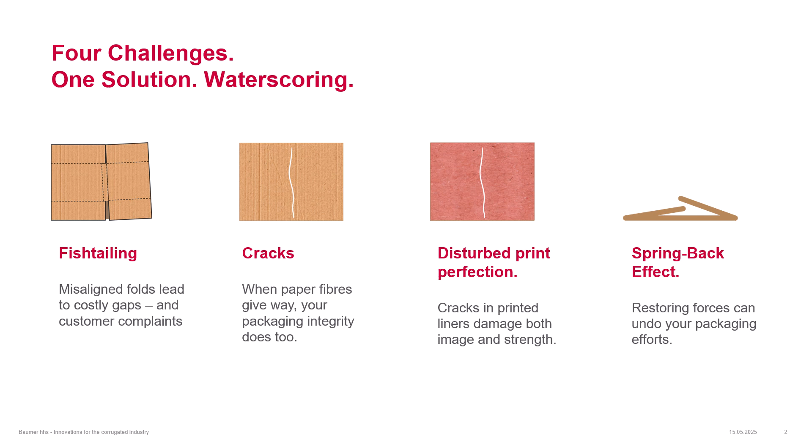Let's get straight to the point. We're not here to talk theory. We're here to talk real problems. Problems you've seen in your own production line: fishtailing, fold line cracks, boxes that won't stay shut, creases that split, and worst of all, dimensional defects that mess with your customer's case erector. These aren't small issues. They jam machines, waste material, and frustrate customers, and it all starts at the fold.

That's where water scoring comes in. We use a purified water blend with an additive that lowers surface tension, applied directly on the board or to the score line as dots or a fine line. Dot mode works up to 150 meters per minute. Beyond that, we switch to a continuous line, still precise, still controlled. And the result? Cleaner folds, fewer cracks, stable, repeatable output.

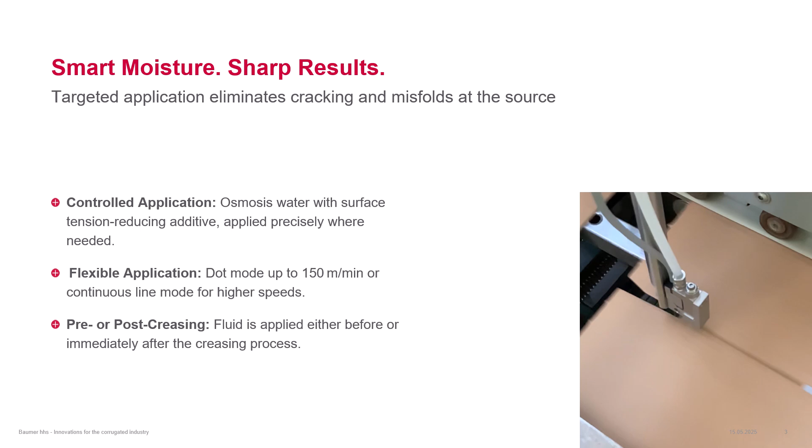Water scoring is running right now on flexo folder gluers, multi-point gluers, and other corrugated machinery like laminator lines, and the impact is measurable: less waste, fewer cracks, consistent box dimensions. Best part, it's retrofit ready, installed fast, delivers immediately.

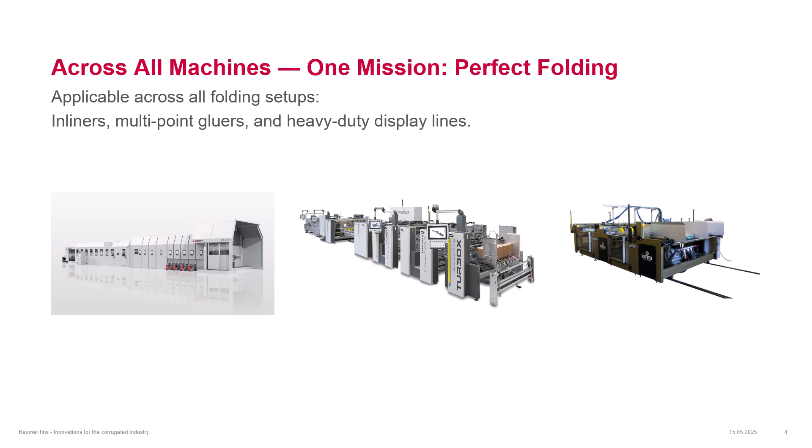But we're not stopping there. Wraparound packaging? Huge potential. Water scoring lowers restoring forces, so glue seams need less adhesive. Reopening is avoided. Pack on demand? Sharper creases can eliminate slotting. That means stronger boxes, built faster, with less complexity. And when water scoring and adhesive systems are controlled through a single Baumer HHS interface, that's true integration. That's value.

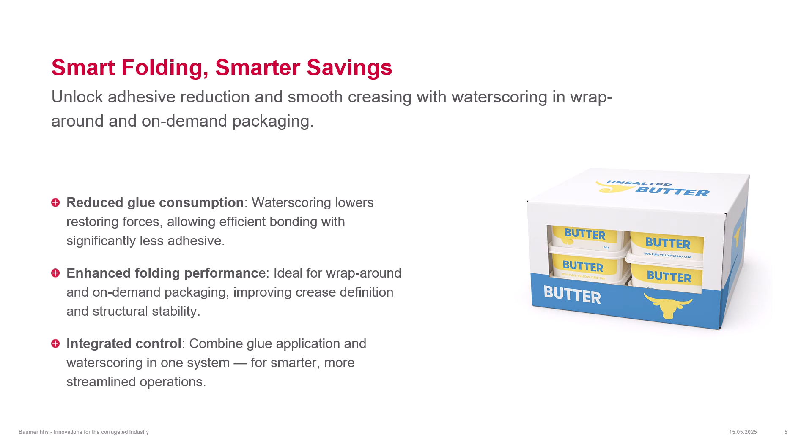Gap deviations, small offsets, big trouble. Fishtailing is one form. Gaps taper, folds twist. The result? Misfeeds, jams, downtime. Seams stay open. Boxes lose strength. Contamination becomes a risk. Loads shift. What starts as a small fold error turns into rework, complaints, even recalls. We can't fix what we don't understand, so let's take a closer look.

Let's talk about what really causes fishtailing and gap deviations. It comes down to two things: the machine and the material. First, the machine. Misaligned folding bars or scoring wheels. You'll get systematic dimensional errors. But the good news, they're consistent. You can detect them, fix them, move on. Scoring pressure, though, is another story. If it doesn't match the board, folds won't behave. Some even switch tools for different grades, which works but costs time. And downtime means lost production.

Now to the tougher part, the material. Moist board creases cleanly. You've seen it fresh from the corrugator. But as it sits, it dries unevenly. That's when the trouble starts. Cracks, fishtailing, misfolds. And moisture's just one piece. Structure, paper type, storage, they all play a role. Bottom line, when the material properties change, you need more than a machine adjustment. You need a water scoring solution that controls the fold where it matters.

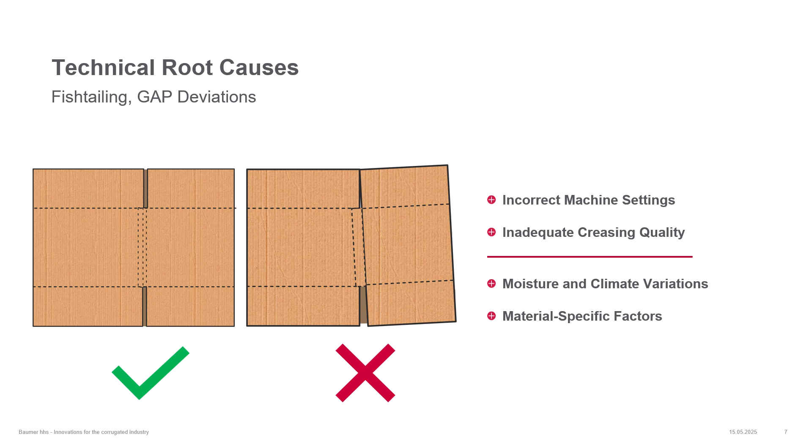Let's be honest, not every box ends up with critical dimensional issues. It really comes down to the material you're using and the box design itself. Now, the two examples you see here, they've shown up repeatedly in customer tests as especially sensitive to misalignment. These are the formats where things can get tricky. But here's where it gets interesting. When misalignment does happen due to material behavior, it's rarely consistent. We've seen it over and over again, in our own gap measurements and in the field.

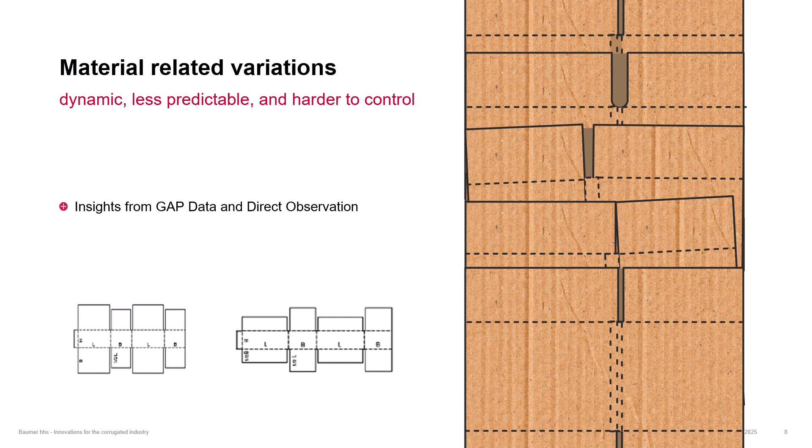You might get a few blanks that all deviate the same way, and then suddenly one jumps the other way. No warning, no pattern, and that's the real problem. Because when those shifts become random, the process gets unstable. And quality, it's no longer something you manage. It's something you hope for. That's not how a modern production line should work.

Not all scores behave the same. Across the flute, no big issue. But parallel, that's where it gets tricky. Researchers tested 180 single and double wall boards under standard conditions. Every score angle relative to the flute worked fine. Except the parallel one. Why? Because it depends where the wheel hits. Land on the flute peak, clean, deep crease. But land in the valley, and misfolds and liner tearing begin. Worst zone, 20% into the gap between flutes, where side forces peak. That's where misfolding and gap shifts begin.

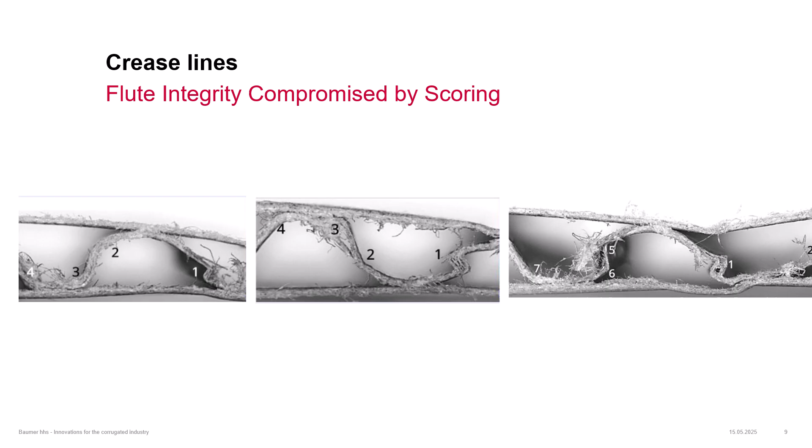Let's take a closer look at the machines, because they're not all the same. It's not just about integration effort, it's about how they're used and what they handle. Take multi-point gluers. They process complex designs, mostly on single wall board, E, B, or C flute. That means narrow flutes, tight scores, and tighter margins for water scoring. Every machine type and its applications have distinct requirements that must be met for optimal performance. Understanding those is key to apply moisture where it works and build solutions that truly fit.

On multi-point gluers, the real challenge is the box itself. Irregular flaps, asymmetrical shapes, thin, sensitive board. Water scoring helps, if it's precise. But if you miss the crease by a few millimeters, the fold fails. Too much water, especially on recycled liners, and the paper starts breaking down. Fibers tear, layers separate. The crease collapses.

One customer ran tests without surfactants. The water didn't absorb fast enough. It sat on the surface and ruined the fold. So here's the bottom line. On these lines, water must hit the right spot, with the right dose, and the right chemistry. Otherwise, you turn a solution into a problem.

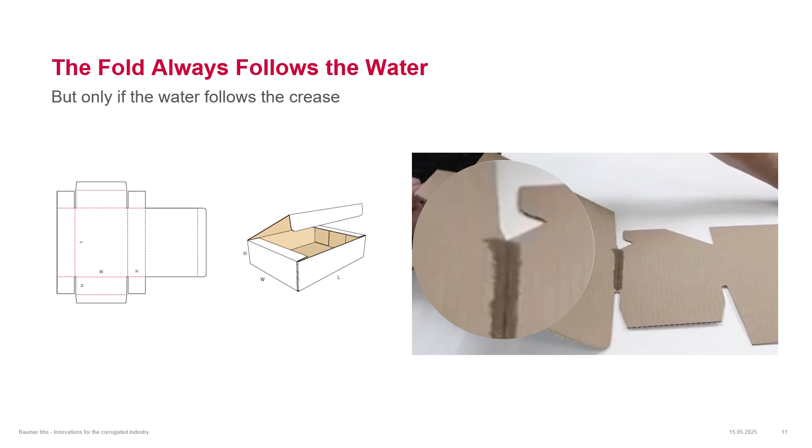Hear that? That's water scoring in dot mode, running at 100 meters per minute. Clean folds, no cracks, just the right moisture, never too much. And here's what makes the Xact Easyfold system stand out. It places individual dots up to 150 meters per minute, dot by dot, every dose identical. No matter the speed, the system delivers perfect consistency. That's key when working with thin corrugated board, where every drop counts.

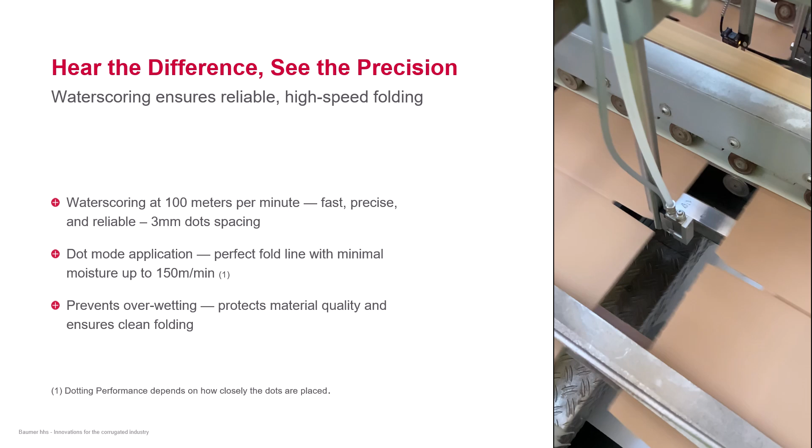And once you go beyond the preset speed, the system switches to line mode automatically, still smooth, still safe, still controlled, no overwetting, just precision at every speed. The SW600 valve does what others can't, dot mode application, even at high speeds. And in folding carton production, that matters. Because too much or too little moisture ruins the fold. With SW600, every dot is identical, precise, repeatable, no leaks, no drift.

And here's the real difference: durability. Most solenoid valves fail from coil heat, but the SW600, we ran it at 850 Hz, non-stop, and the coil stayed cool. Yes, the stroke adjustment takes some getting used to, but once set, it's rock solid. Pair it with the Xact Easyfold system, and you've got a dotting setup made for performance.

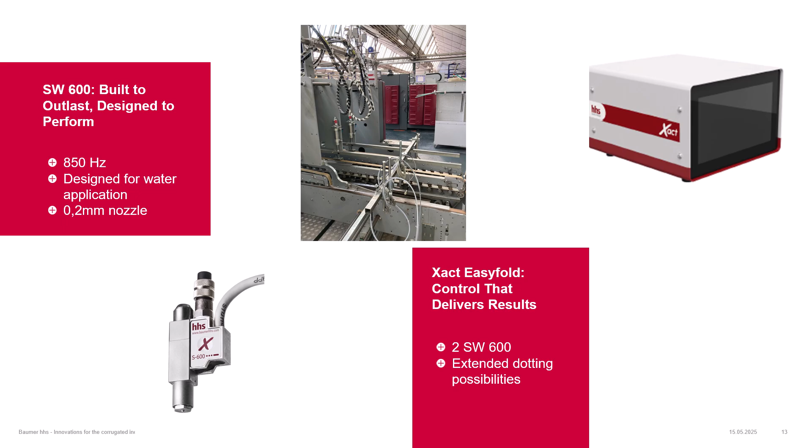Let's talk about inliners, also called flexo folder gluers. They build slotted boxes. The standard of the industry: flat, fast, foldable. But here's the challenge. The material varies. B flute, C flute, double wall, even triple wall. And each type folds differently. Inliners also use wider crease lines, so we need more moisture per fold, not random, controlled and consistent.

And then there's the machine itself. More enclosed, more complex, harder to access. Integration is not plug and play. That's why we don't just install, we customize, with modular mounting kits tailored on site, because with inliners, precision and adaptability go hand in hand.

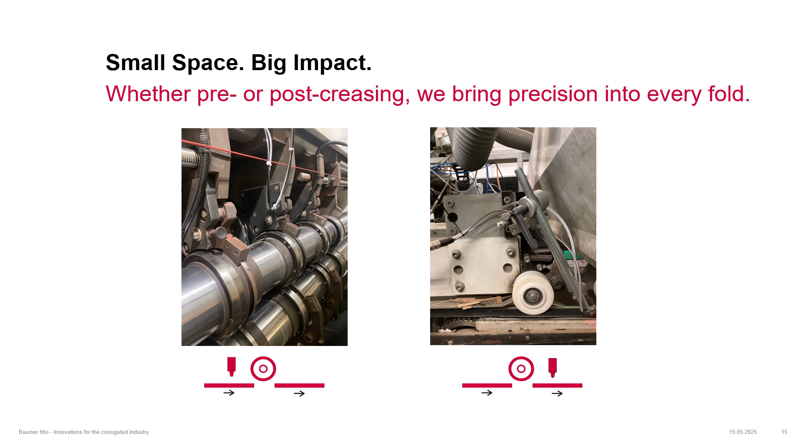In inliner applications, there are two ways to apply water scoring: before creasing and slotting, or after, directly on the score line. Each has pros and cons, but one thing's clear: space is limited. So integration must be exact. Here's the upside: many inliners have adjustable folding rails, and we use them as mounting points. That's a big plus. Once the valves and sensors are aligned, they stay aligned. No need to reset across the full machine width. It saves time, reduces errors, and keeps scoring consistent.

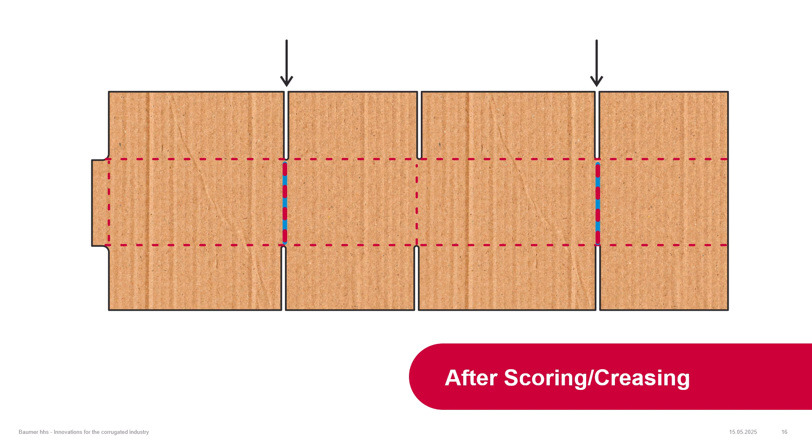Let's start by looking at the application of the moisture solution after the creasing or scoring step. Here's a real-world example from wine packaging, a box type many consider forgiving. We applied water scoring on a Bobst 924 after the creasing unit directly on the score line. Without it, the adhesive gap skewed by up to 4 millimeters, visible and unacceptable. With water scoring, that skew disappeared. In most cases, it wasn't even measurable. Worst case, just 1 millimeter.

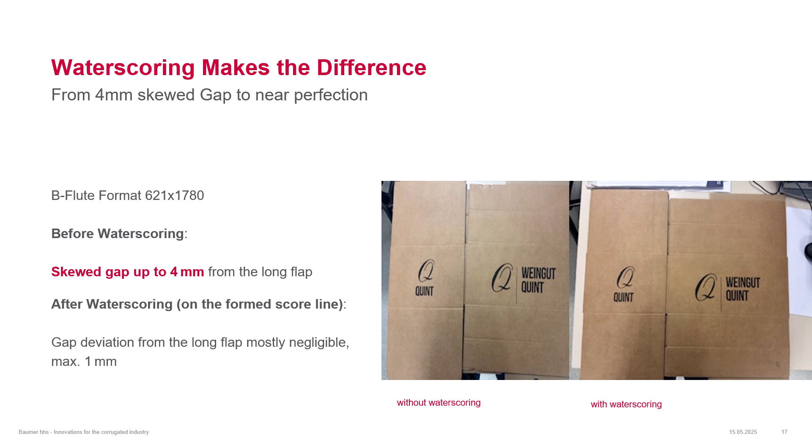And this wasn't lab work. It ran with a high production speed with 2 to 3 bar water pressure. Bottom line, even with easy packaging, water scoring delivers better alignment, more stability, fewer quality issues.

Here's what direct water scoring on the crease line delivers. In a B-flute field test, the creasing wheels were completely disengaged, and yet the fold held perfectly. Only minimal wheel contact was needed for guidance. That's the power of precision. Apply the right water amount in the right spot, and the fold follows the water line. Apply too much, and the board softens.

But done right? Box compression tests showed no drop in strength, even directly after application. No soft spots, no failure. Double E flute held up. But heavier boards like BC flute, they resist more water penetration. That's where the limits start. So, direct application on the score line works best on light to mid-weight board, if it's controlled, consistent and clean.

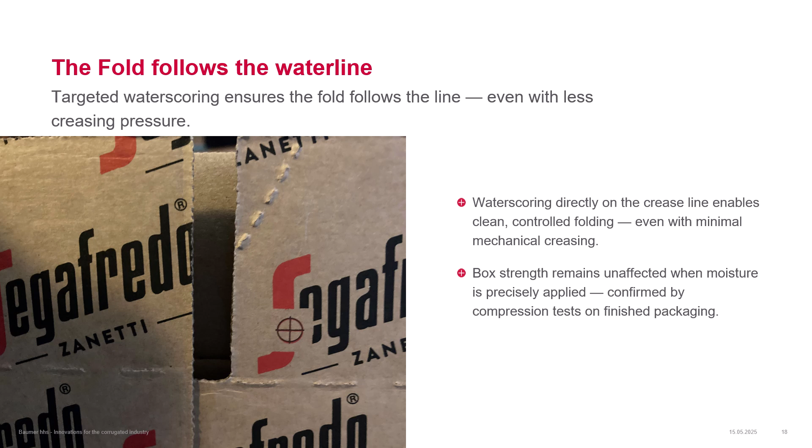Mounted on the folding rail, the water scoring nozzles automatically move with the machine's format setting, always aligned with the score line. The operator just enters the desired water line length in the Xact Easyfold interface. A margin of 5 to 10 millimeters from the panel edge works best. One important point: make sure water hits the board, not the machine. That's what keeps folds precise and your equipment protected.

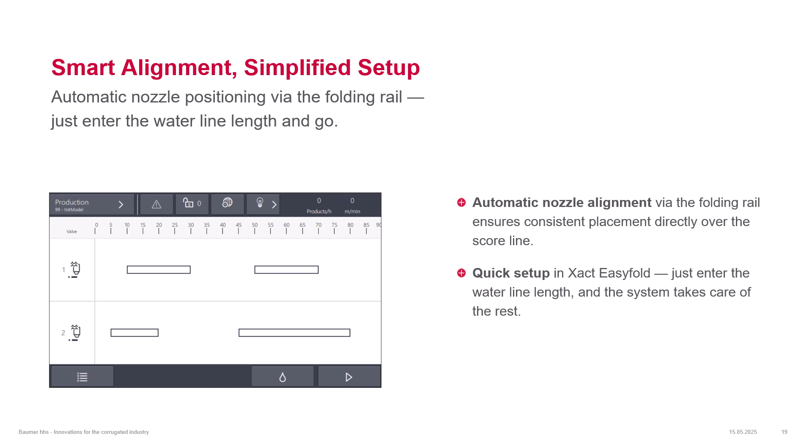Let's start by looking at the application of the moisture solution before the creasing or scoring step. Let's look at what happens when we apply moisture before the creasing and slotting unit. Unlike post-creasing, which controls the fold line directly, this step does something else. It preconditions the board. The moisture softens the fibers, so the scoring tools can form a cleaner, sharper crease. More precise, more consistent, less affected by liner stretch or back pressure.

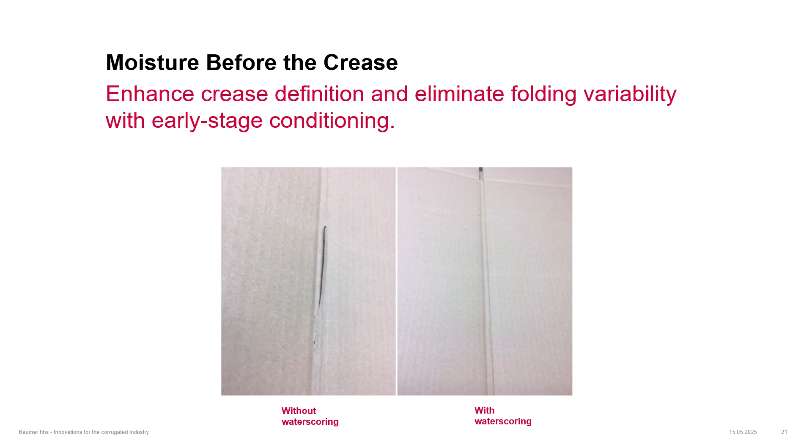It suggests that pre-wetting might be the better choice for heavier flutes. But to be fair, we need more data to confirm that. Still, this image shows what's possible.

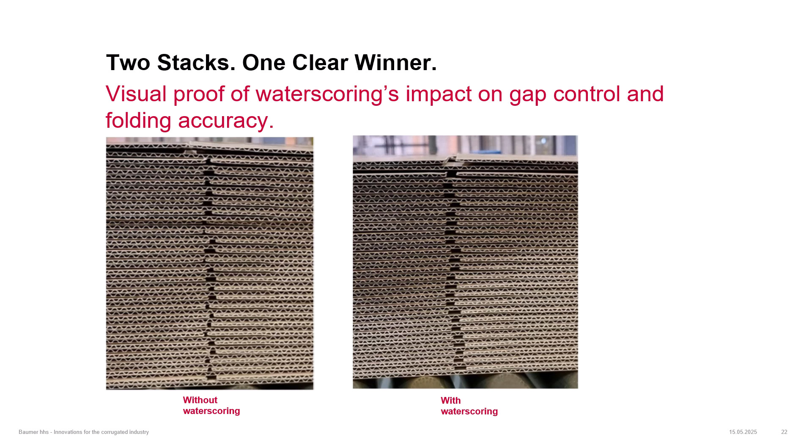Simon and his team had their hands full during the install on the Martin 1232, but they nailed it. Big thanks and congratulations to everyone involved. What really made the difference? A customer who was all in, committed, supportive, and fully engaged. That kind of partnership doesn't just get the job done, it makes it a success.

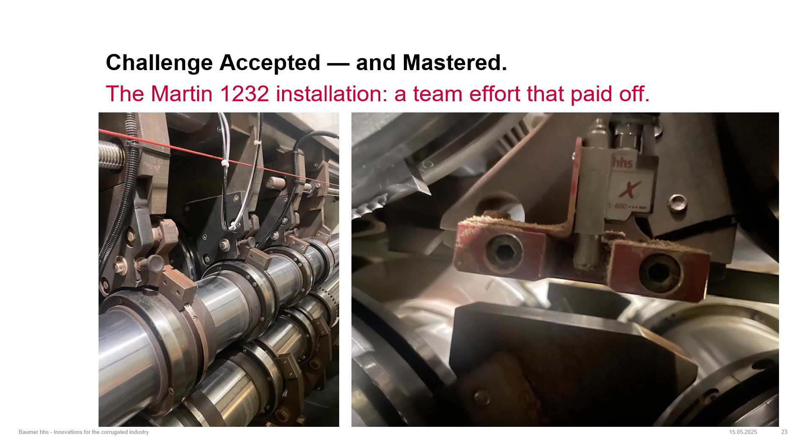Earlier, we saw great folding results from a German test with water scoring before the scoring unit. But there was a downside: paper buildup, some rust on the scoring wheels. Now compare that to our field test in Sweden. Same setup, same timing, but after 2 months in production, no rust, minimal dust, clean performance. So what's different? Possibly the amount of water.

But one factor stands out. The Swedish customer adds 10% alcohol to the mix. That might be helping to keep the tools clean. We're now reviewing this carefully, technically, procedurally, and from a safety standpoint. Important note: alcohol use is not yet approved in the system. We need to resolve all safety questions first.

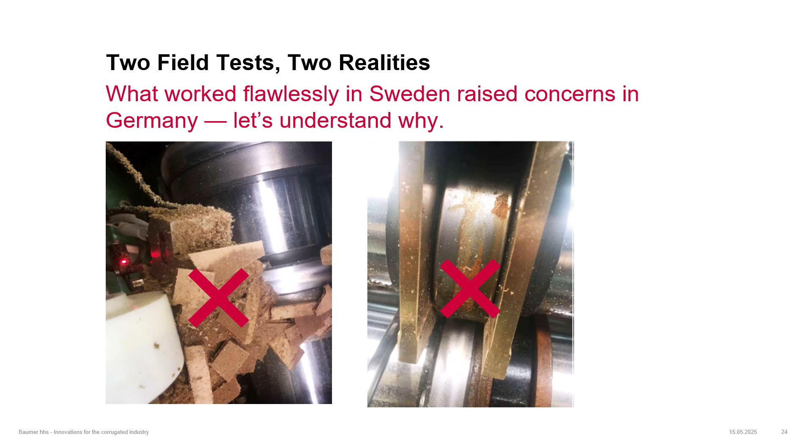Let's talk about why the SW600 makes sense, even on an inliner. First, its size. It's compact, so we can mount it close to the board, even in tight spaces. That's a real plus in a crowded machine. Second, it was built for water. And that matters, because water plus metal usually means rust.

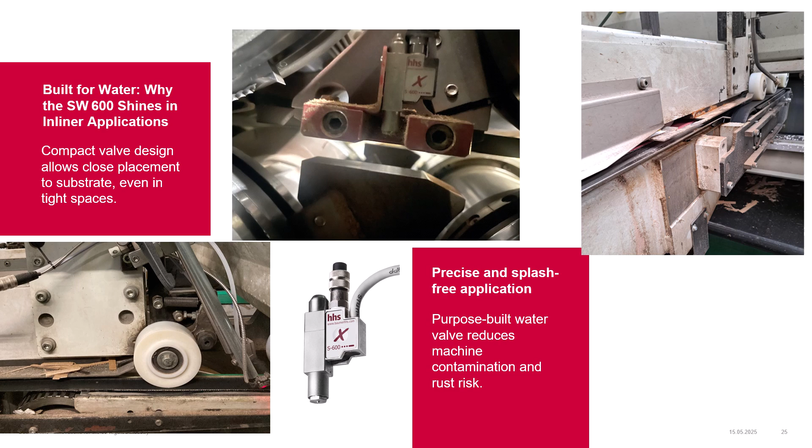Here's another example of just how versatile water scoring really is. We've got 3 Lamina machines running our system, processing heavy corrugated board for display packaging. Slower speeds. No additives, just pure water. And it works. It's a strong reminder. Water scoring isn't just for inliners or gluers. There's untapped potential in end-of-line custom packs and across many corrugated applications where targeted moisture adds real value.

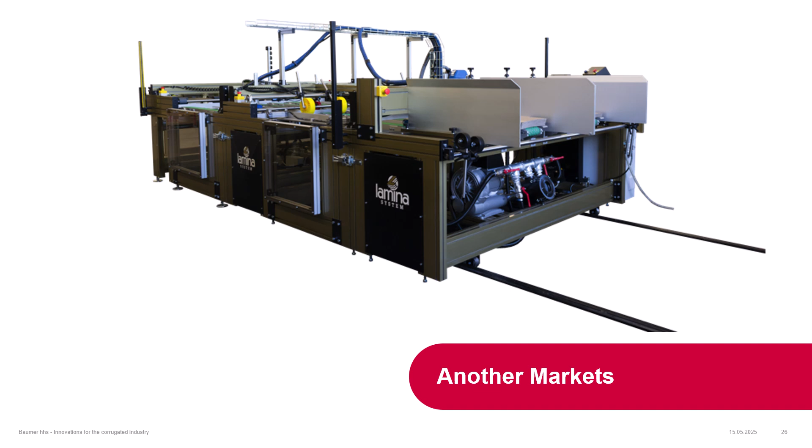Let me walk you through the current project timeline. The core package for folding carton gluers will be ready for order by June the 20th, 2025. Additional options will follow step by step. The base package for inliner, with moisture applied after the scoring unit, is scheduled for release by June 30th, 2025.

But as you've seen today, every machine is different. We'll provide structured kits, yes, but on-site fine-tuning will still be needed. Even machines of the same model can differ, by year, layout, or options. Installation before the scoring unit, still under evaluation. We'll announce timing once all parameters are set.

What's important? We're ready now to support custom setups through direct consultation. And I hope one thing became clear today. This is not just about mounting a valve. It's about understanding the material, the machine, and the process.